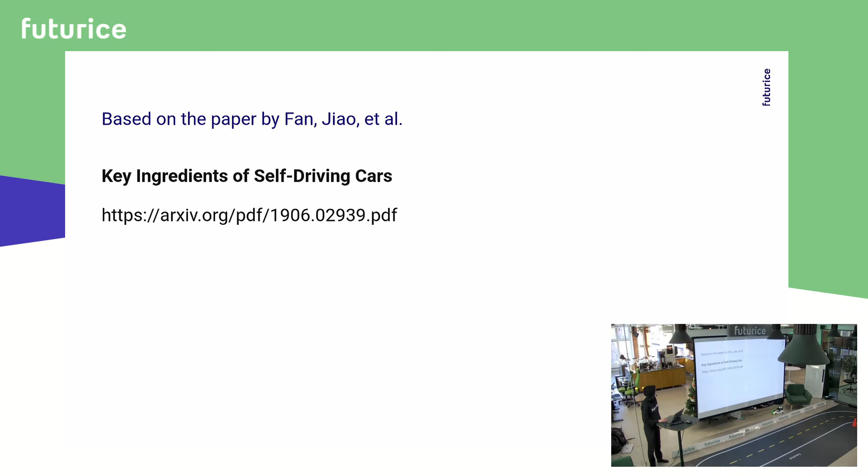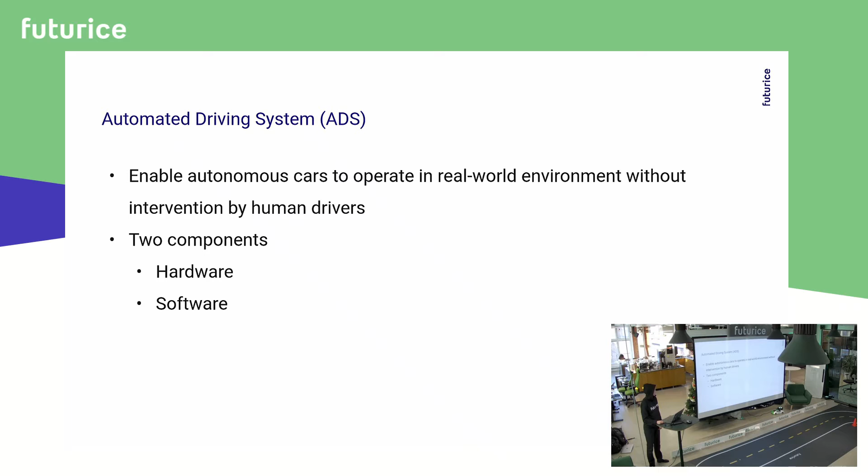So let's move on. Autonomous car systems is the topic. If you think of an automated driving system, their main point is to enable these cars to operate in real-world environments without intervention by human drivers. Now, it doesn't have to be completely automated. It's very helpful if it's just partially automated, as we all know.

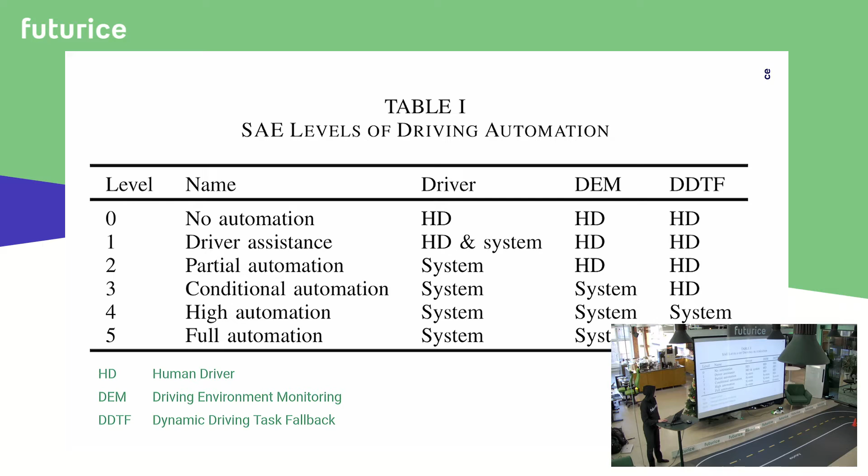These systems can be divided into two parts, the hardware part and the software part. You may have seen this before, but this is kind of an official table, I don't even remember what SAE stands for, but these are defined as the levels of driving automation. When you look at this table, HD stands for human driver, and there are some other acronyms at the bottom. At level 0, when you have no automation, the human driver is responsible for everything, and then incrementally the system starts taking over. I believe these higher levels are way ahead in the future, but this is kind of a hopeful table that has been set up.

Now, everything starts with the sensors. Some of you probably have been tinkering with a car, so you know a lot about these sensors. But here's just an overview of what would go into an actual, not mini size, but an actual autonomous vehicle. First of all, there's cameras.

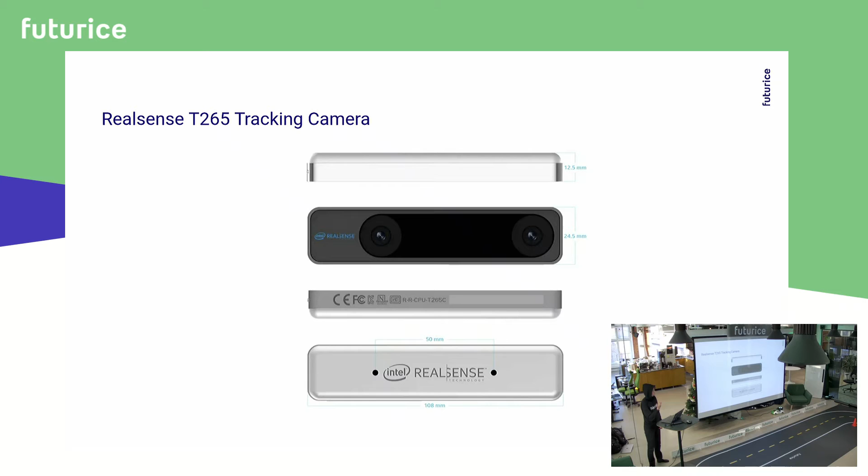Well, this is not from a real human size car, this is from our Markku, so there's not much use of this yet. But this is a tracking camera. A tracking camera basically takes care of reporting where the car is. It's important to track it through time.

And then there's the possibility of taking a stereo camera and images that are slightly different, and then with algorithms constructing a 3D model of the environment using that camera without a LiDAR. Here's the one that we have here from Markku, and we have great plans for this.

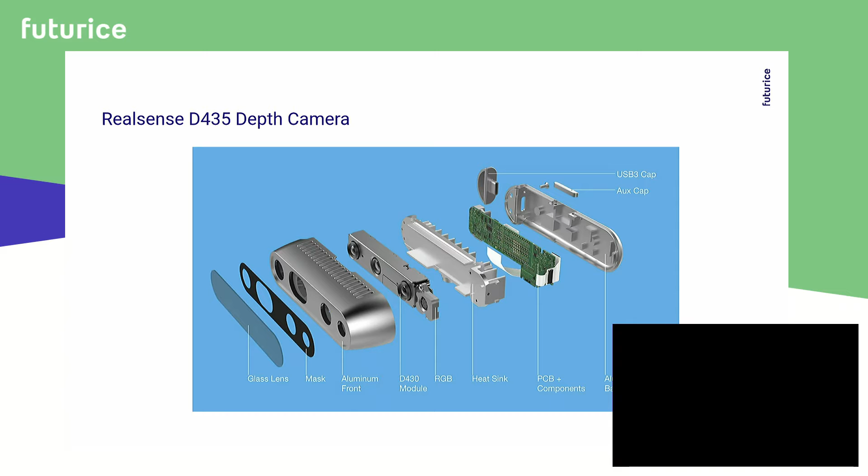Then there's also a company called Wayve, W-A-Y-V-E, who developed maybe a year ago this car that they were training with reinforcement learning. A human driver would drive it, and then in 20 minutes or so it would learn from the corrective maneuvers of the human driver. I believe they were just using one monocular camera, so no stereo vision, just a single camera. So maybe you don't necessarily need all of that stuff. It's a good idea to have many of those cameras, but still they don't have to be super fancy, even for real cars.

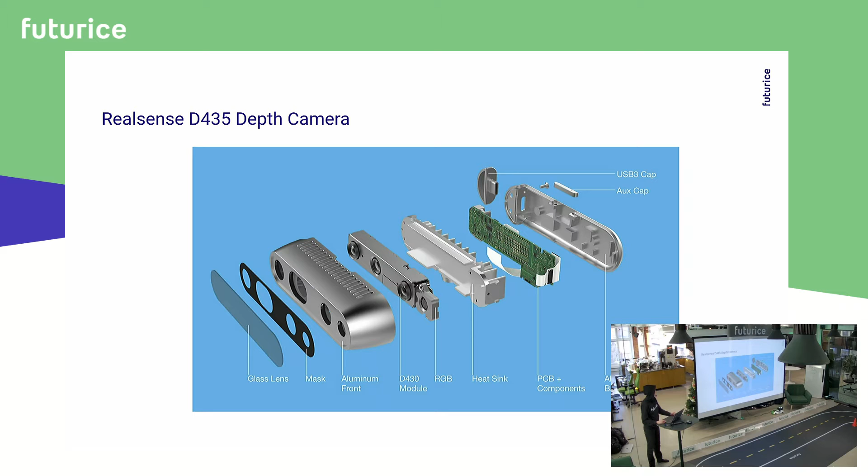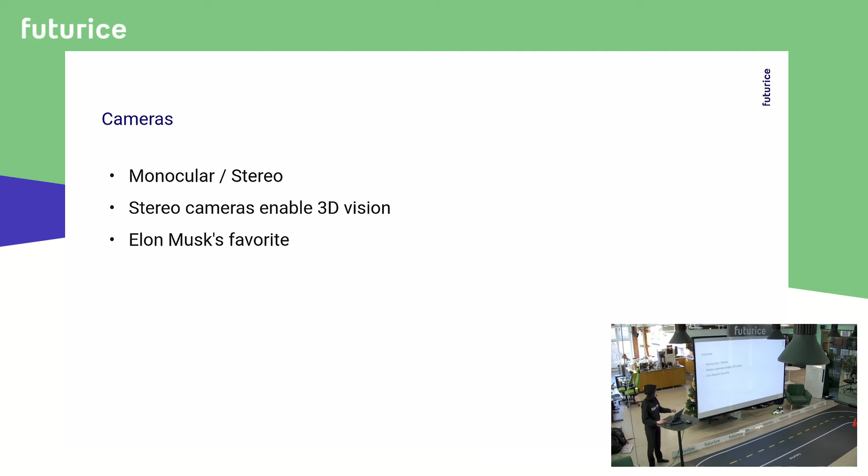LiDARs are short wavelength, obviously. They have a wider field of view, and the problem with them is that they kind of have a short range, at least the affordable LiDARs.

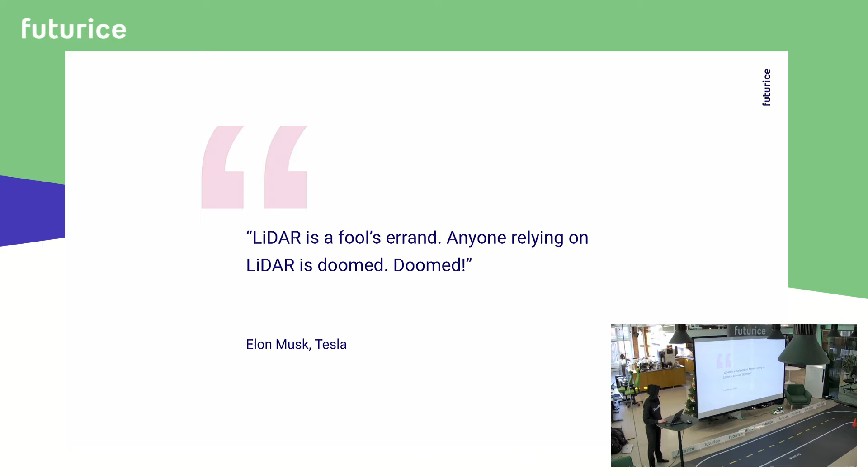And this is Elon Musk's pet peeve. He thinks that they're almost evil, as he has stated. I don't remember how long ago this was, but he has stated that people using LiDAR will be doomed, and that they will realize that they've made a huge mistake. And the reasoning is that it's an expensive piece of hardware, and if you have something that can break, it's useless in his opinion.

And there's actually research to prove this also, although the argument in the previous slide wasn't super convincing. But this was from an article published, I think, sometime around a couple months ago. At Cornell University, they were actually bending towards Musk's approach in this, that maybe you shouldn't be using this expensive piece of hardware. However, it's super cool, so I don't think people will be giving up on LiDARs yet.

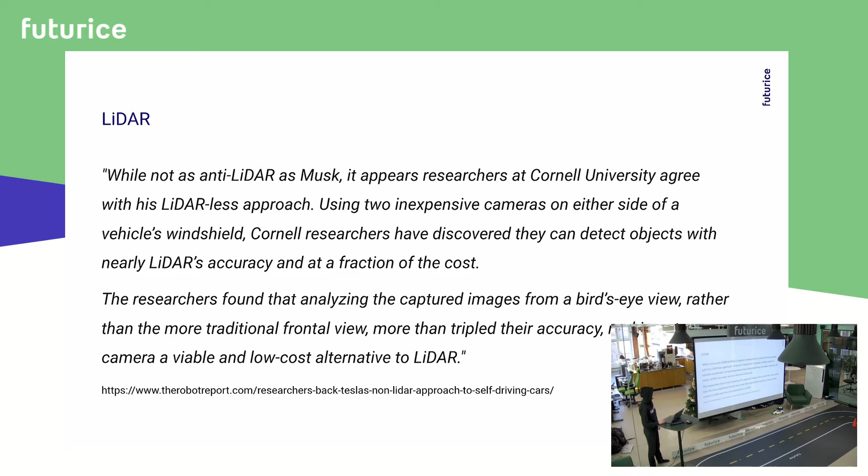Then there's radar, which is of course already in use, with longer wavelength. And this is very good for cases where detection distance is important, so you need a long distance. But the exact size and shape of the objects are not recognized as well because the wavelength is much longer. And then there's ultrasonic transducers.

And here's an example of a Tesla model with the radar. And well, there's just one camera, apparently just one, okay. And then there's 12 ultrasonic sensors. So these kinds of things usually form up the sensor palette.

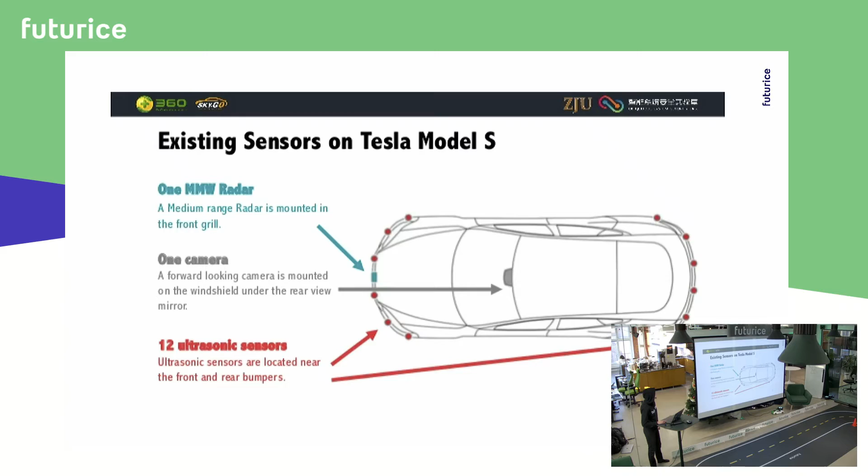Then there's GPS. Sorry, time of flight laser sensors. It's a brand new, relatively new sensor from ST Microelectronics. The exact sensor is the VL53L1X, and it basically measures the distance with the time of flight of the laser. So it hits the laser, it reflects back, and then it just measures the time. And it apparently works better. I think it's the same principle as the LiDAR, just a single unit.

So instead of using ultrasonic sensors, you could use TOF sensors. Just an addition to that slide there.

And well then, of course, there's GPS, but the problem is, as people know, that the signals can be very weak and they can be easily blocked, especially when you have high buildings and these urban canyons. So you need these IMUs and/or wheel encoders as backup for them.

But in all cases, you will never find an ultimate winner sensor, so that you just have one sensor. You will always have different types of sensors and fuse data from them, and that's a good idea, and there's redundancy and everything.

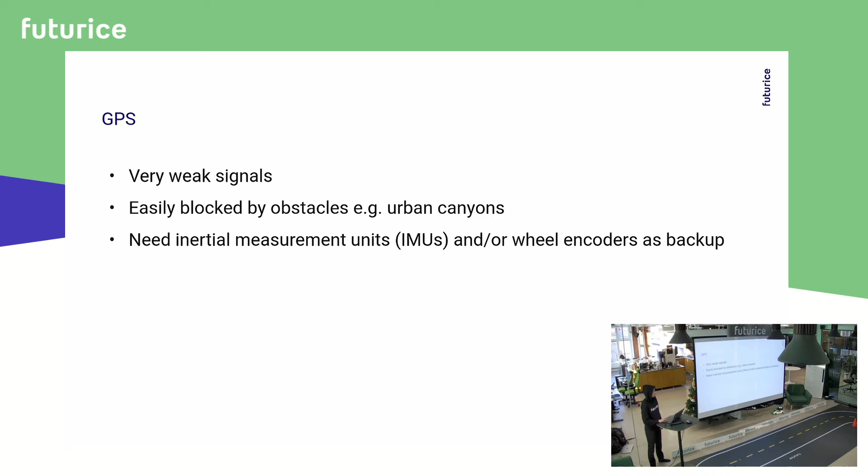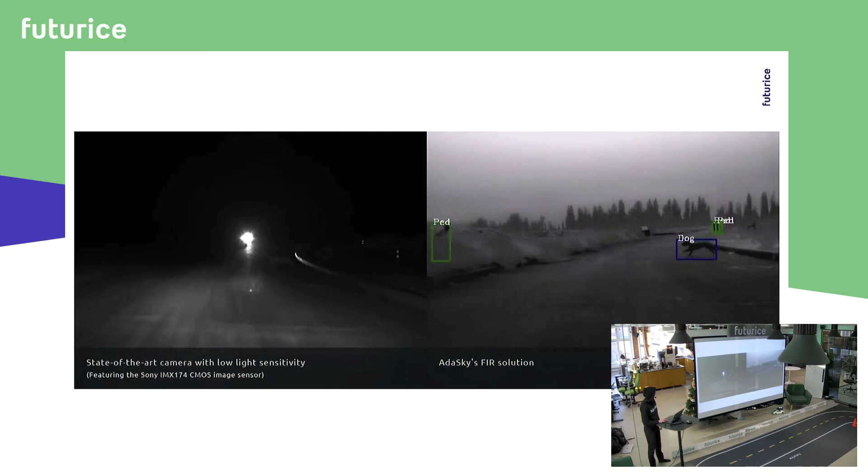Then there's this far infrared. Now, I may have fallen for an advertisement for far infrared, but I was checking out this article, and it seems that it would nicely complement these other sensors, and it's been used, but not everywhere. So here's an example. In scenarios when there's not very much light, it could be a very good addition, and especially this image is kind of convincing.

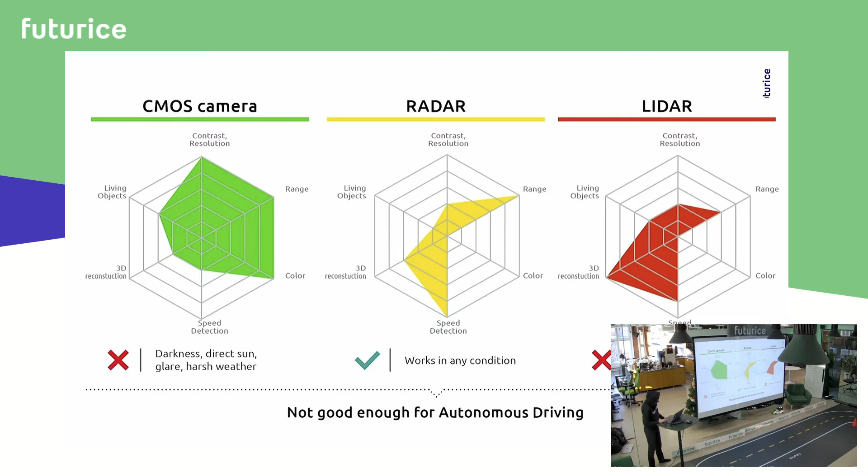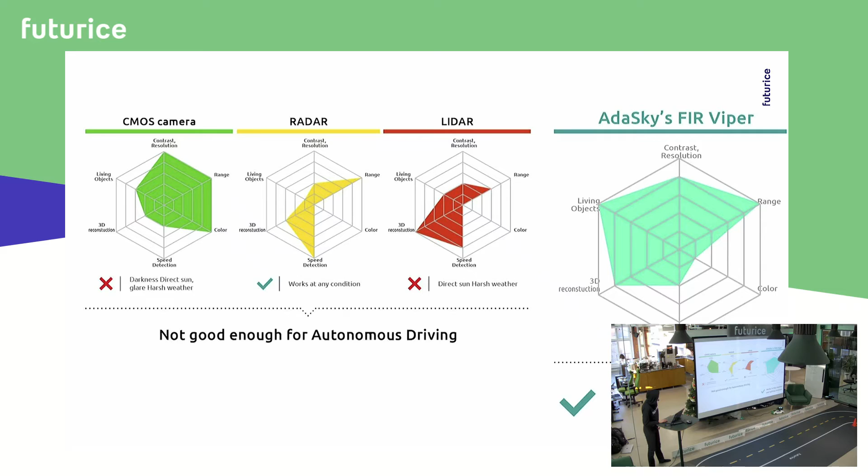And then without the far infrared, when we look at these three that we've talked about now, like the camera, the radar, and the LiDAR, think about the areas. These are diagrams that demonstrate how well this type of sensor is doing in whatever kind of environment. So a camera is good at picking up contrast and resolution, and a radar is not so good. Then apparently, since there are some sectors missing, at least the people who came up with this article state that the far infrared would be a very good idea to add to this palette. But these are the kinds of things that you have to consider when thinking about the set of sensors that you will be putting on the car.

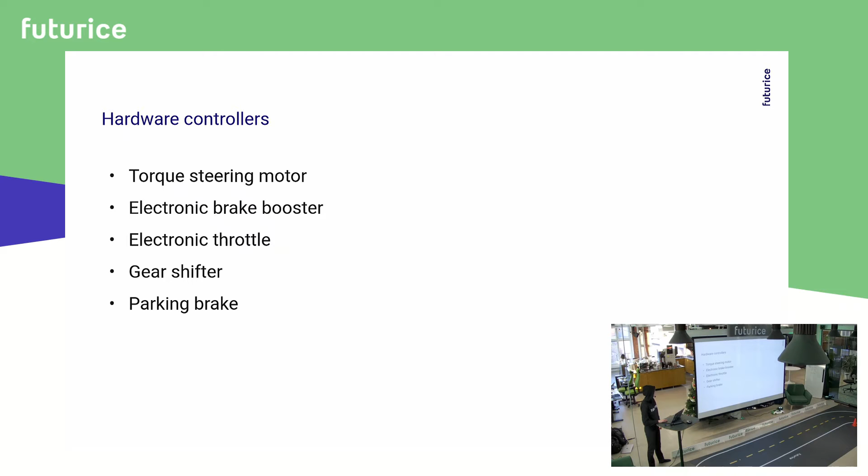Then there's the hardware controllers. So you have a motor, you have a brake, you have a throttle, a gear shifter, and a parking brake. Our cars, or these little cars that people have been tinkering with, obviously don't have these necessarily, but for actual cars you will need them.

And localization and mapping has to involve communications with other vehicles. So now for very short introductions of these modules. This is going to be an overview, basically just introducing these names. Hopefully there's something you haven't heard before, but even if there is, repetition is the mother of something - I don't know what it is in English.

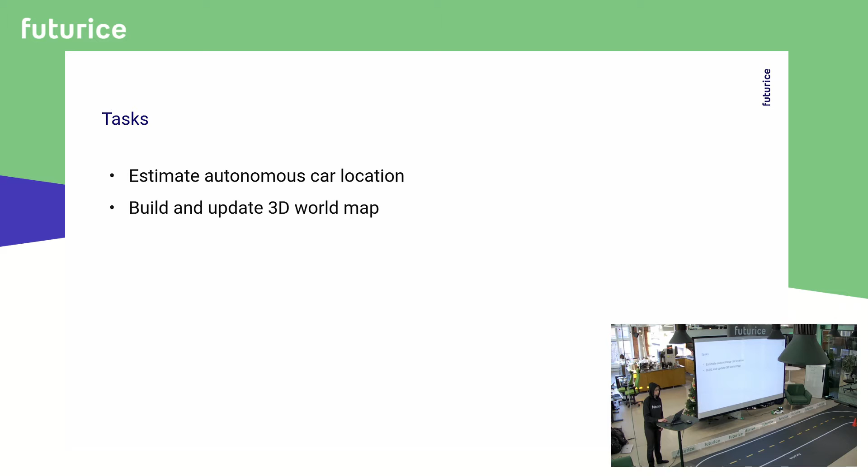Then there's the localization and mapping module. Its tasks are to estimate the location and to build and continuously update the 3D world map. There's this method, SLAM - simultaneous localization and mapping - which comes in 2 types: filter-based and optimization-based. Again, I don't really know much about this. If someone is an expert on this, please speak up now before I speak.

Okay, enough silence. So how I understand this is that the first one, the filter-based, is about incrementally taking in the sensor data and going with it, not really looking back. The other one is looking back at the previous poses, and there's a difference. Definitely look into this - SLAM keeps coming up everywhere, and it's the key to everything. Although it was invented in the 80s already, I believe they're only now making good use of it because there's so much more computational power available.

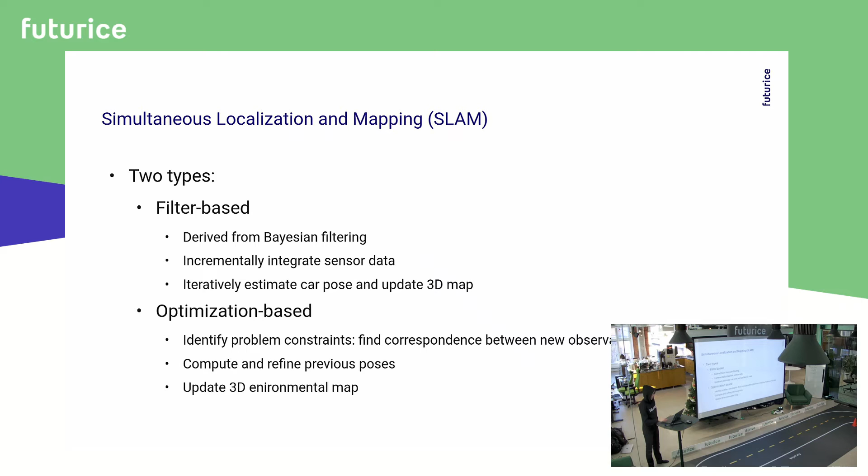Well, in essence, when something is moving around, it constantly has to know where it is, and it has to update its map accordingly, as we do - but we are born with this skill.

Then there's the prediction module, which analyzes the motion patterns of others - a big issue. Of course, it gets easier when everyone starts using autonomous vehicles, because then there's less observation to be done. You can perhaps trust the information you're getting from those other vehicles. A host of other problems from there as well, of course. But the prediction module predicts future car trajectories, its own and those of others, enabling the autonomous car to make appropriate navigation decisions. Again, there's morals and ethics involved with this, but I'm just conveniently skipping that part.

There are 2 ways to make these predictions for now: model-based and data-driven based, kind of analogous to the difference between having a model or just having data. There was also mention of people trying inverse reinforcement learning. We're going to hear about reinforcement learning in the next presentation, and perhaps you can bombard the presenter with questions related to inverse reinforcement learning if you wish, but I can guarantee nothing because I've only heard about it recently.

Then there's the planning module. Its task is to determine possible safe navigation routes based on the information received from the previous modules. You have to do three things: plan the path, choose the maneuver - here you obey the traffic rules, you can of course remove this need so everything gets easier, but then you go to jail - and calculate the trajectory. I think this is the part where you actually think about things like the comfort of the passengers, because you could take a car from point A to point B in a horrendous way for the passengers, but you might want to accommodate them.

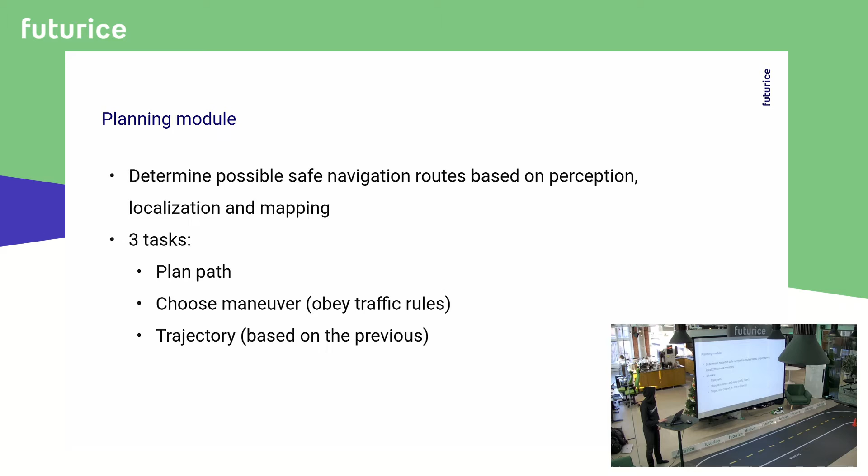Then there's the control module, which is all about throttle, brake, and steer. You have an ideal state - what you want to have - and then you have the observed state, and you try to minimize the error function between those.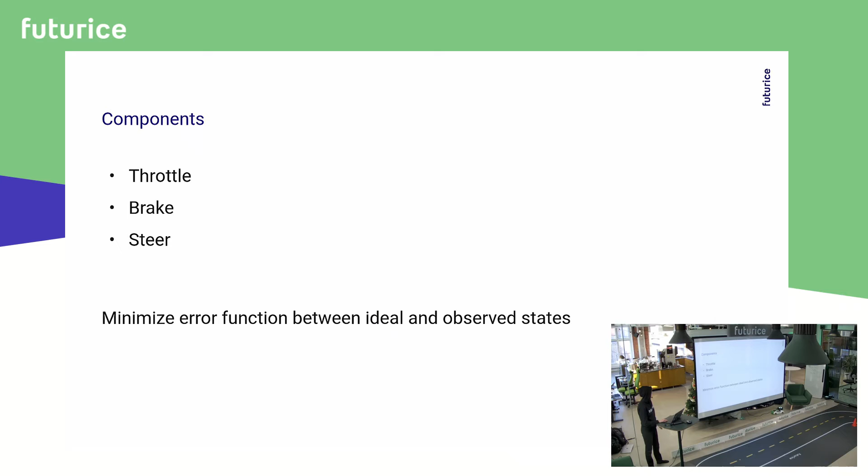There are open source datasets available. How many of you have made use of these, some kind of open source dataset, or have you just collected data from your own little car? Mostly the latter, okay. There are some available, and I don't have the URLs here, but I think we'll be posting this presentation somewhere, so I will add them in due course. Definitely check them out.

About this industry leader thing, I was looking at these—I guess these are considered the leaders at the moment, but when I was looking at the accident rates, they were so strange. In this article, it said General Motors had something like 2 accidents per 200 kilometers or so, but Tesla had like 1 accident per 3 million miles. I don't know if there's something wrong with those metrics, but I'll have to check them out. Obviously, how do you measure the successfulness of these? There are so many things to consider—safety is probably first, but there are many dimensions against which you can measure them.

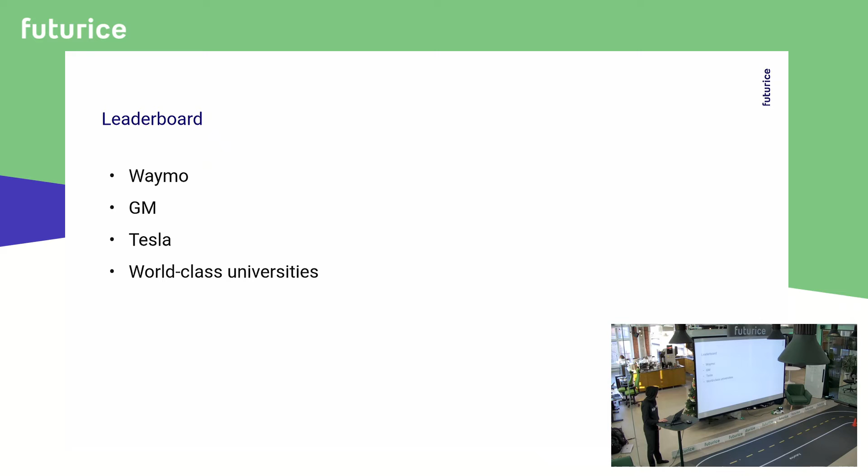The universities are also keeping up nicely. But yes, there are challenges, many challenges. According to this paper, at least, the main challenges were related to the perception module for now.

There's the issue of poor weather, and you've probably run into this when training your cars. Poor illumination—darkness, contrast, like when you go into a tunnel. That is something many of these systems have a very hard time handling, even the pro systems. You have bright sunlight, then you go into a tunnel or come out of it—sun contrast, reflections, and shadow.

I believe that snow and all kinds of strange forms of snow, slush, and these things that Eskimos have a million names for, are probably not at the center of investigations in warm places where a lot of this research is being done. So I believe there are additional challenges related to snow, cold climates, and black ice.

What is wrong with my writing? I'm sorry, I was in a hurry, and my network connection also failed on me, so I'm double sorry.

Then there's the complex urban environments, and the methods are still a bit intensive. Actually, thinking about the Elon Musk argument, wouldn't the point of using lidars be that you get to sidestep a lot of the computation? I don't know, I'll have to read the paper.

Do you have a statement to make? Do you want to use me for it? Oh, you have another mic. Thank you—no statements, but thank you, Inka. And next, Natalia.

Okay, I think I have quite an ambitious title, right? But I was thinking about how to call it and how to make it more general, and I came up with this title. So sorry if it's too general.

I come from Tampere University—the former part is Tampere Technical University—and I'm doing postdoctoral research there. I started a year ago working more on robot learning, and before that I came from the signal processing department, not from RoboLab or the mobile lab, and before that I was doing signal processing for some underwater robots and some computer vision. My PhD was about computer vision, but in a more traditional sense—I did it six years ago, before the rise of neural networks. But nowadays, as you know, there are neural networks everywhere.

A year ago, I started my Academy of Finland project about robot learning. We have several more people doing their PhDs and masters. So I'm now going to tell you about it.

I'll talk about robot learning approaches and recent trends that I like and that you might want to use in your systems or in future work. Then I'll tell you about my favorite project from everything we're doing, more from the practical side, so you can also see how it works.

Like the previous speaker, I think we... how was that word? We complement each other, because now we will go more toward learning and see some examples in practice of how that could be done.

I prepared a slide where I formulate this racing problem as reinforcement learning and describe the components, in case someone might want to try it. I also have some hints on how I would approach it, and we actually have a bachelor student approaching it that way. Maybe he will join this event at some point, but we have different cars, as you'll see.

So let's go to the topic. There are robots, and robots are very different.

Nowadays, when I was doing my PhD, which I completed 6 years ago but started 10 years ago, learning was mostly concentrated on the vision side. For example, for computer vision, the ImageNet dataset appeared and a lot of work was done on that. But robot learning was done more with traditional methods like optimal control, and those two areas were not intersecting much.

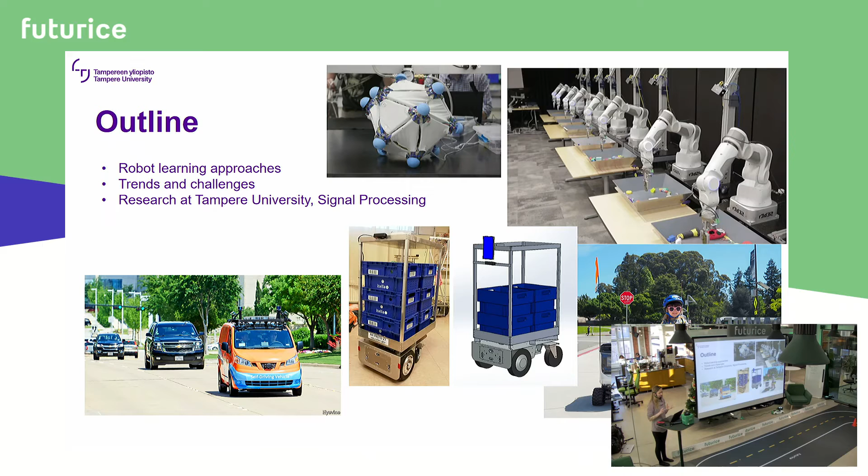So then there appeared this whole paradigm of reinforcement learning, which is learning where the agent takes an active part in it.

The difference is that this approach, reinforcement learning, was formulated maybe in the 50s or 60s. Before that there was optimal theory, game theory, all kinds of things, which were then joined together, and from there became this reinforcement learning area of research.

So there is an agent. The agent acts in the environment, observes the environment, then acts, and takes an action that it thinks is best, and then gets a reward. The agent has some goal - someone told the agent what the goal is - and then the agent tries to optimize its behavior.

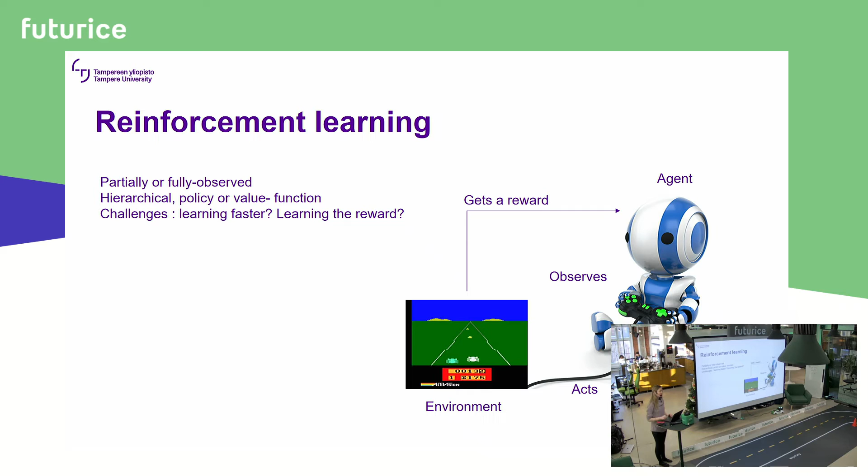So I listed here some hints for myself. There are problems with that - it will take a lot of time for the agent to perform in this environment from scratch. Then who will actually formulate the goal, who will formulate the reward? If you start thinking about how to implement that, what is the model behind it? What are you trying to optimize?

I'll go fast through the current trends. I won't go deeper into the theory because you can check it yourself, and maybe I can talk about that later. But I think these several works that I mentioned are covering quite important topics in reinforcement learning now, which could be utilized further by you.

For example, it's very handy to train in the simulator, as the previous talk was saying. It's very important, and I would definitely try to do it in your place, because you save time and resources. Of course, how you transfer from the simulator to the real world is another question. In this work from 2019, they said that they can train a similar system in the simulator, then use trials from the real world with a similar robot to modify the simulator so it has features similar to real life.

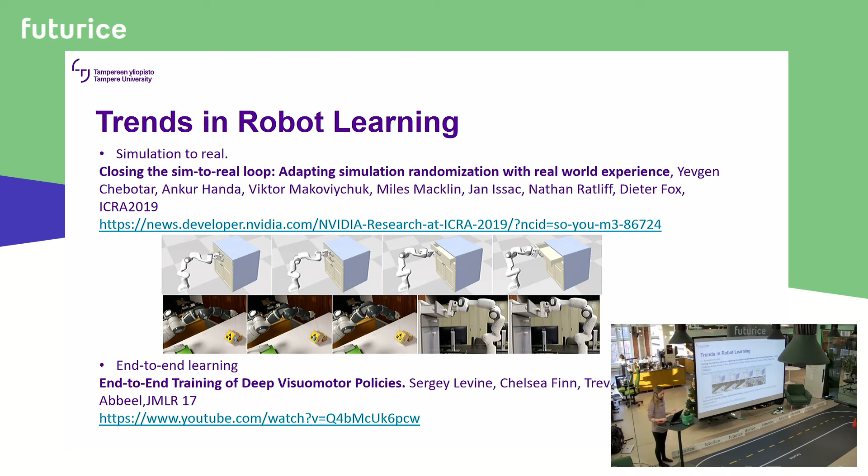Then there is an approach called end-to-end learning. This is one of the ways to approach it, when you have only sensory data - maybe high dimensional, maybe RGB images - and you just try to directly match them to the actions. So you don't think in that structure of planner and perception unit. You want to build a pipeline which handles everything from beginning to end. This is handy but challenging, but some people have attempted to do it.

Then there is a very recent Nature paper, which I didn't read in depth, but it says there are ways to integrate memory into that. It also reduces the learning time and resource usage.

And then there are people creating huge data sets for training, because if you consider a robotic arm, some people have shown that this robotic arm can move this kind of cube on this table. The problem is what they demonstrated only works for this exact robotic arm moving this exact green cube in this exact environment, so it doesn't generalize. So they approached it by creating a huge data set that would cover many possible circumstances in which this robotic arm can operate.

Then there is learning from demonstration, when the user or someone else first demonstrates the correct behavior of the robot. For example, we were also attempting this in the beginning of our bachelor thesis - demonstrating the correct way of driving and then training some model.

Then you can also think about creating some smart sampling of your previous experience while driving, utilizing all the samples you already collected from all the conditions. Also, as the previous speaker said, there are model-based approaches. It's not only that you utilize the model describing the dynamics of the robot, but you can also learn the model that describes your environment. I'll show this a bit later if I have time.

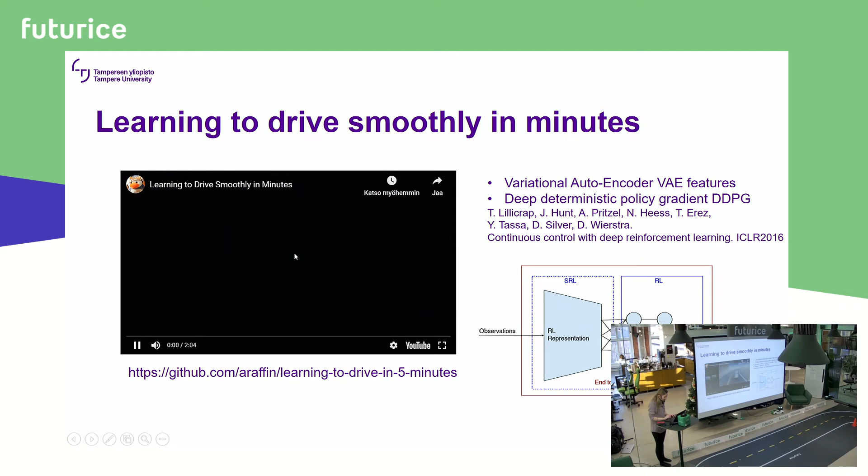Driving smoothly in 5 minutes. Did you see this? So it's like a very handy thing, I think. Well, wait a second. How to press it? So here there is a block. Wow. Okay, we don't need music here.

The point here is that these people wrote a blog post and published a paper, and they presented in Python the virtual environment that you could use. We are using it too, because the track looks similar—only features like the sky may be different, but you can train there any of your agents, even not necessarily reinforcement learning ones.

Although they already provide some code, for example, for extracting variational autoencoder features—the features that map from RGB space to some latent space that describes the image very well. So you could use this one, I think it's a good idea.

And then it uses this deep deterministic policy gradient, one of the RL methods. So one could try that.

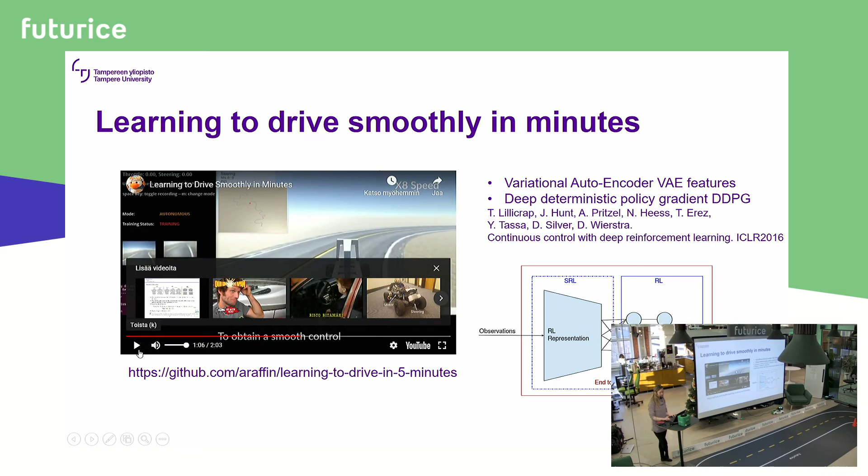On top of that, we also think it might be useful to get some prediction about the environment. I know this comes very fast, but maybe it stays in your mind, and the slides are available so you can have a look. So the idea is: can we model the environment somehow?

There was a paper that demonstrated that in game planning you can predict the future environment based on what you see and what action you take, and it helps you behave better. So that's another idea that can improve all these things.

There's a link to the paper, and they have code too. Then, I would like to show maybe something that we were working on.

And it's not racing cars, no. At Tampere University we got this track, thanks to Mikko, I don't know how this all happened, and thanks to Futurice.

Since we have this track now, we also have MonsterBorg cars. For some reason we already had monster board cars before we knew about donkey cars, so we could still think about changing, but we have several monster board cars and several students working on them.

After we got this in spring, we started making up something with those. So maybe we will also appear here as a team one day.

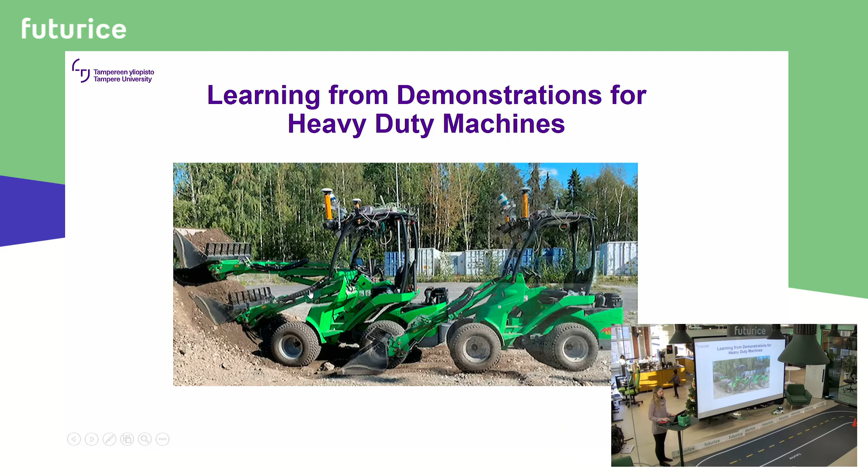We decided at that point, when we didn't have a simulator—nowadays we are going to get one—to record demonstrations. It was the day before Juhannus, and we were thinking we'd record maybe 100 demonstrations, and we did it the whole day.

I also get skeptical, because technical problems are 50% of our work, I think. You just start doing something and there are technical problems, so it's normal—it means it's progressing.

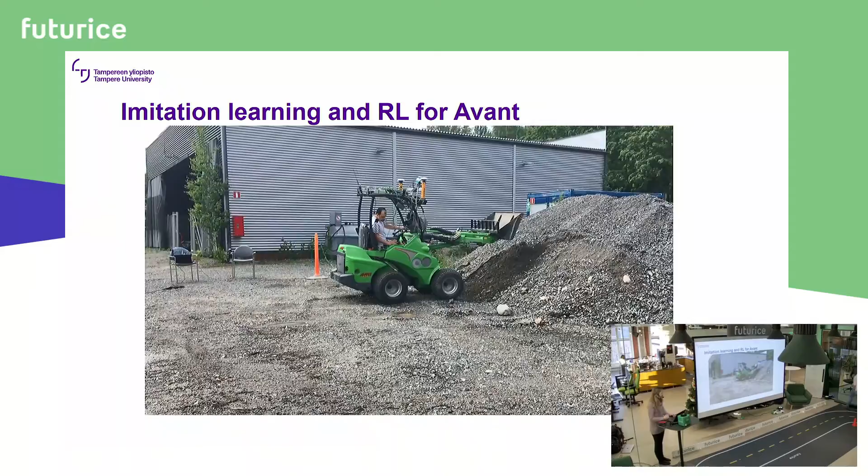Oh my God, I think there's some delay in the video. But anyway, that guy was out there collecting the demonstrations. And also there's this problem of who restarts the system, because the system has to go forward and perform the action.

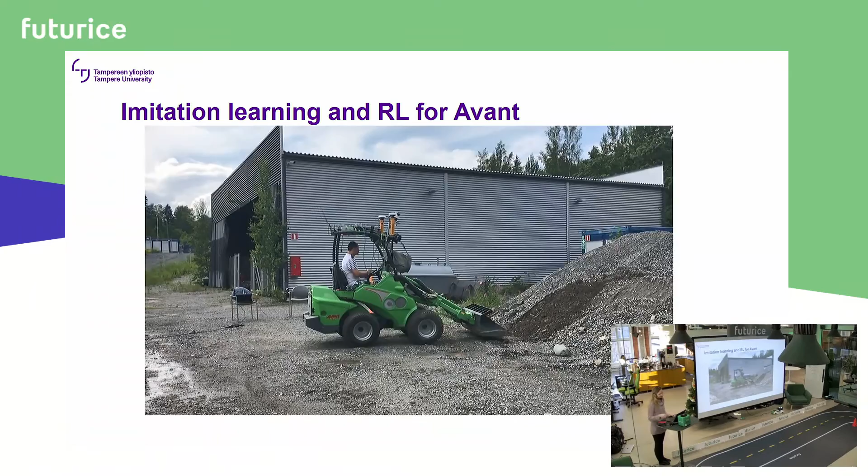I get skeptical when people say we have a professional driver who can in 2 hours collect millions of demonstrations for us. That's not true. A non-professional driver can collect maybe 100 or 200 demonstrations in one day, so you have to be modest about that.

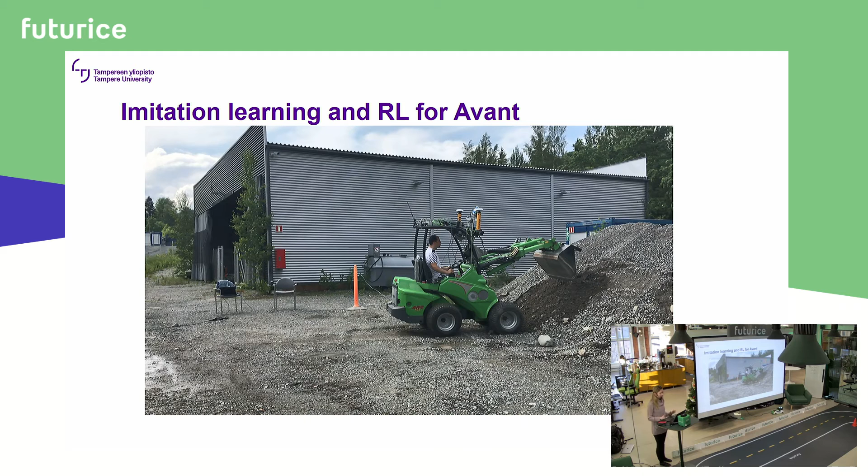This is an example of signals we collected apart from the camera, and these are some unsigned values, sorry for that. But anyway, as the previous speaker said, there's lots of data available, and one has to deal with it.

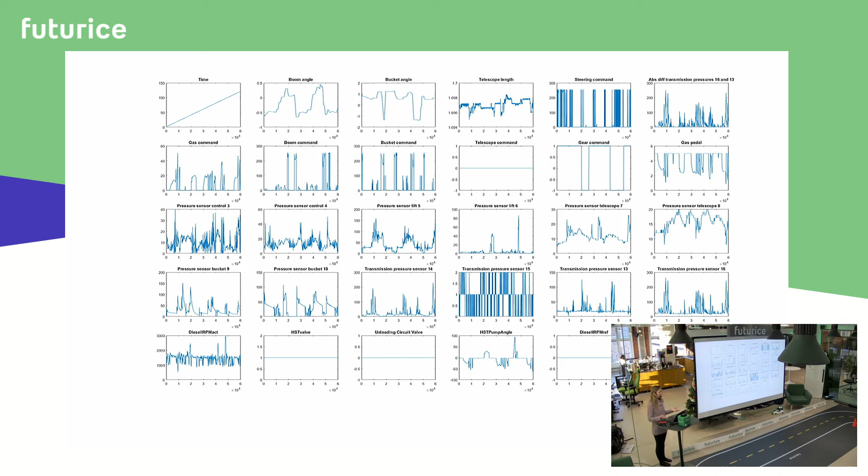This is the demonstration we collected, so the machine sees it like this: it's far away, then it drives up and scoops, and a full scoop is a good outcome.

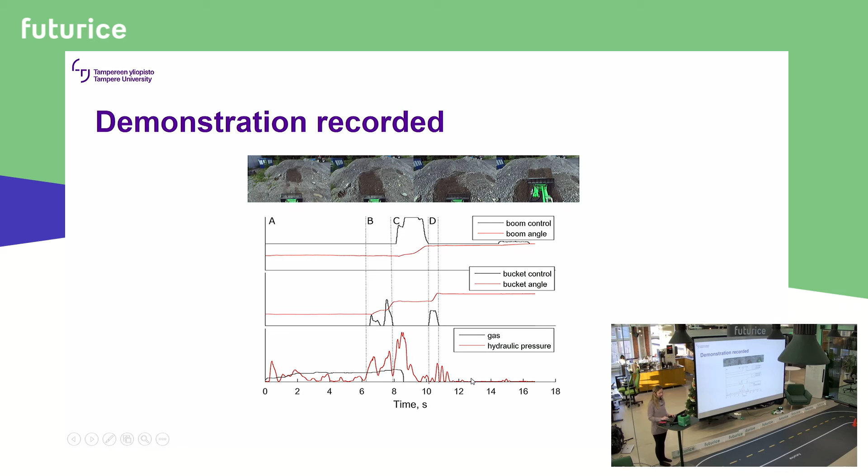We also recorded data because we had ideas about which pressure sensors might be good or not. For example, here is the boom angle and the bucket angle, and here is the hydraulic driving pressure. When it approaches the pile, it has to drive in a certain way, almost crashing into the pile, and the hydraulic driving pressure grows, which may be a hint to the algorithm, but we didn't specifically say that.

These are some references our work is based on. The idea is that we get the reward at the end of the action, and we evaluate it visually, using learning from demonstration.

The special thing about this work is that you are manipulating a granular material, like loose material, which presents extra stochasticity, like driving in an unknown environment. The environment presents additional variations, because you don't know how the material will behave. You are modifying it, and it becomes complicated.

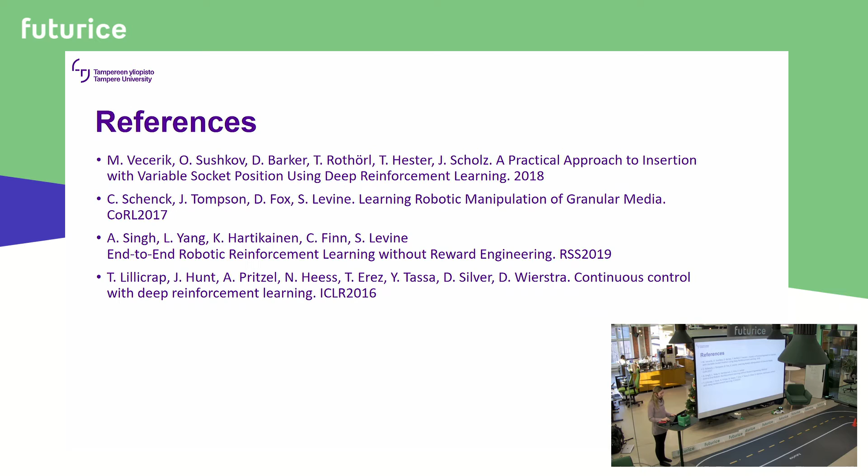We used visual features which we trained in a Siamese network way, so that we want to distinguish between failure examples and success examples. We feed those examples to two networks, and we want to maximize the distance between features of dissimilar examples and minimize the distance between features of similar examples.

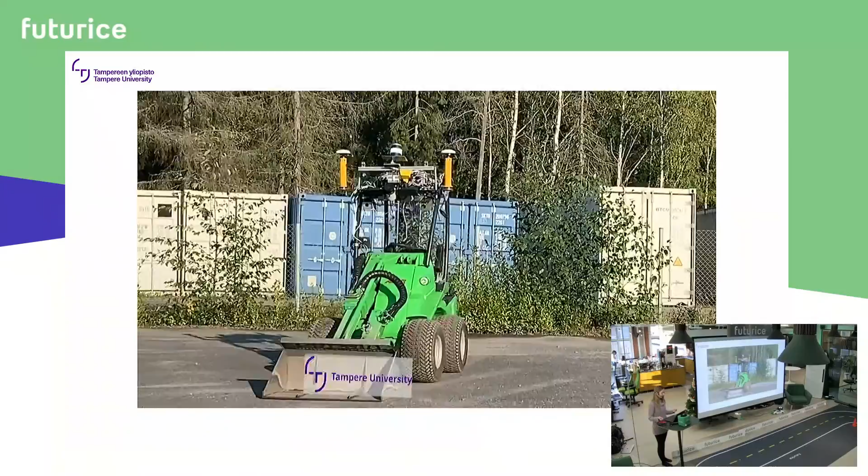I must disappoint you, we are working on reinforcement learning, but we did learning from demonstration. So we are on the way towards reinforcement learning, but we needed some kind of learning before. We show that it outperforms the state-of-the-art neural network controller, which of course we attempted.

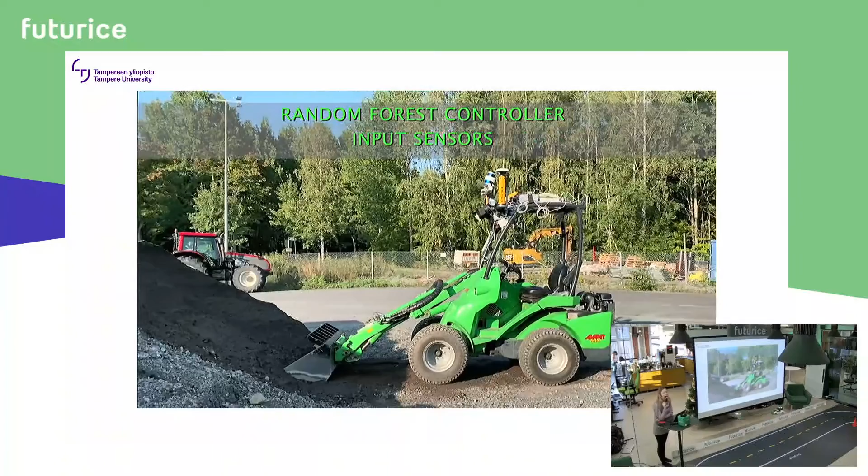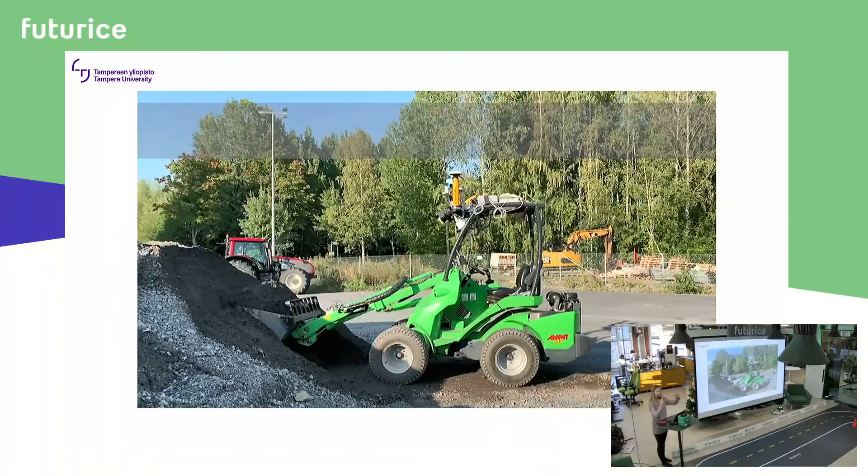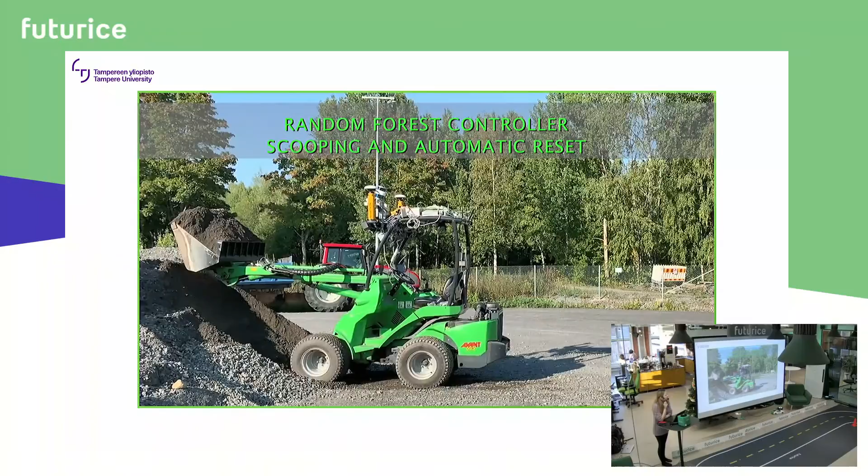The thing is, when a person demonstrates some actions, they sometimes show them differently, taking even a different route. So in the data space it looks like multimodal data, and neural networks sometimes learn average behavior, which is not so useful in those cases. That's a reason why we also use random forest, and we show that it works better than that.

I don't know why there's something wrong with the video. Sorry, but it works smoothly. It doesn't look like it. How efficient is it right now?

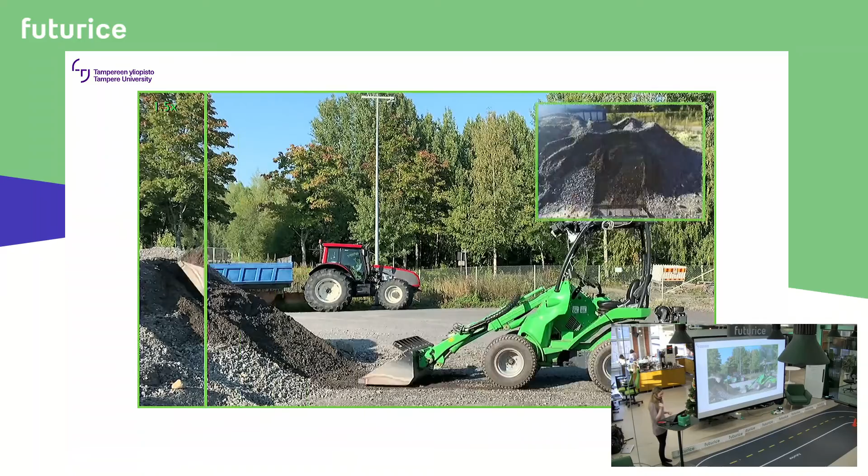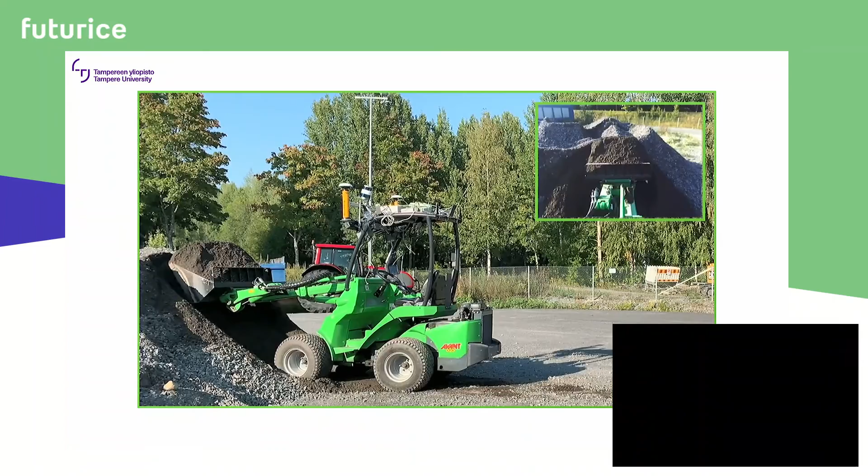How efficient is it? Is this moving right now? There's also this additional difficulty: when we recorded the demonstration versus when we are testing, it's always a different daytime, sometimes evening, sometimes not. So there's a big variation, and we might say it succeeds about 80% of the time. I think it's quite good.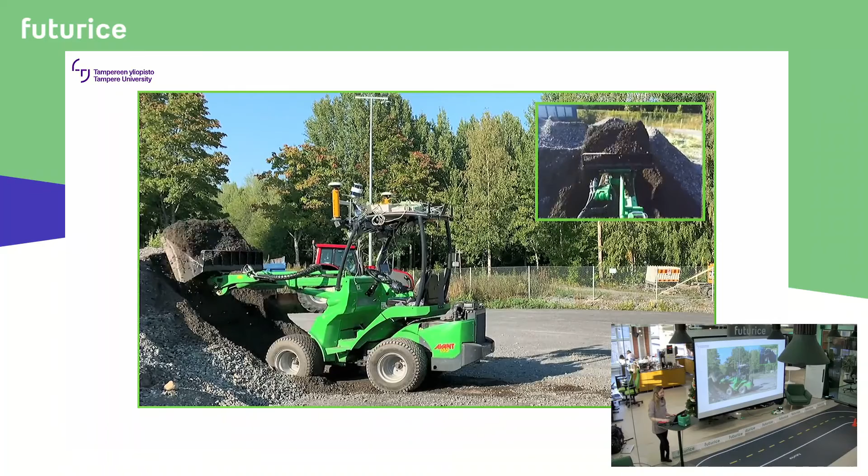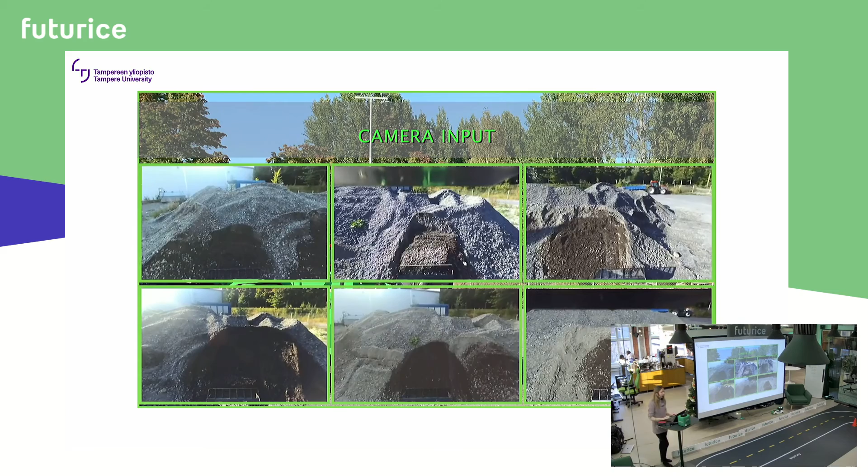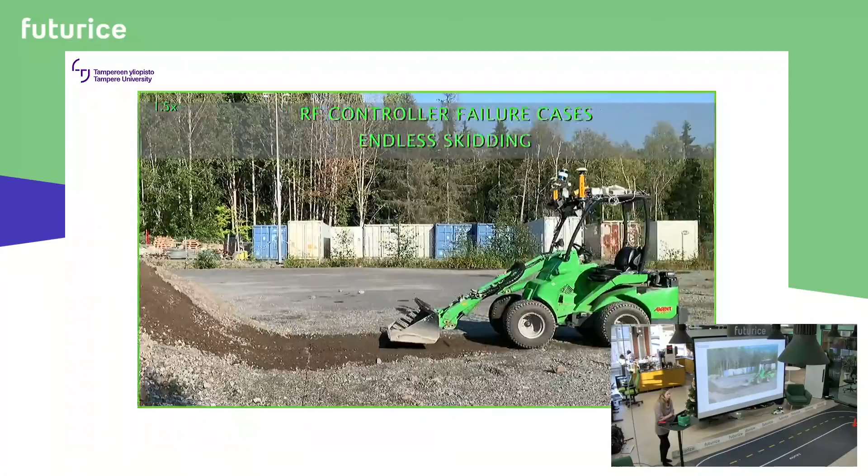Right now on the pile, as it keeps loading, the pile should advance, and then the machine should advance to engage the pile. Does it do that automatically? This is, we don't know exactly how it does it, the algorithm does it, because the pile moves ahead. So when the machine's bucket is engaged, sometimes it has to go forward.

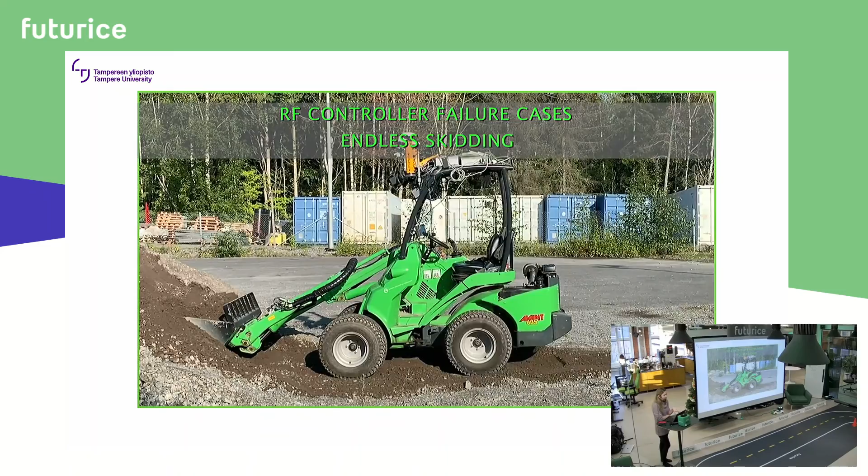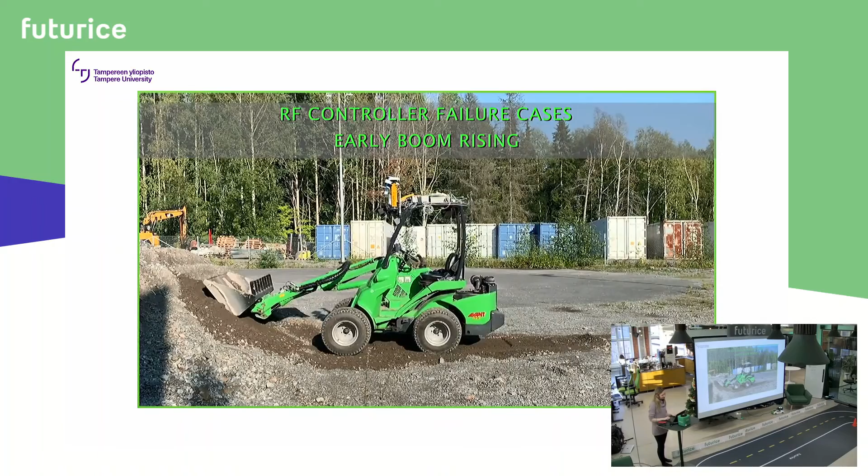It's this—I think those hydraulic driving pressures take care of that. There are pressure sensors in the machine which help it not only to see but to understand. The pile is modified, right? Yeah, but still when the pile begins, the hydraulic driving pressure grows, and that gives a hint. Then when the bucket hits the pile, another pressure sensor gets engaged. So those signals are fed to the system.

In the future we want to robustify the reward. We want to robustify the features because there is lots of variation.

You do that through MATLAB? No, Python. MATLAB, like Simulink, is responsible for the control of the whole machine, and we communicate with it using a Python script. Open source stuff? I don't think so. This project is not sponsored by any machinery companies yet, so if someone wants to collaborate...

Should I throw it into you?

So just to clarify, you guys have used supervised learning for this example, right? Yes, this is supervised learning. And you're planning reinforcement learning in the future? Yes. So do you have some sort of simulation you're building or implementing, or is it going to be reinforcement learning in the real world?

The thing is, in summer we were trying really hard to make this work as reinforcement learning. We spent lots of time trying that, but we found that training from scratch, we don't see any result and cannot evaluate whether any method is working. So just this week we were visiting Mevea and we will get simulators from them. They are not an exact copy of our machine, but they are some excavator there, and we can train things and see whether those methods we intend to use converge and produce any solution for similar tasks.

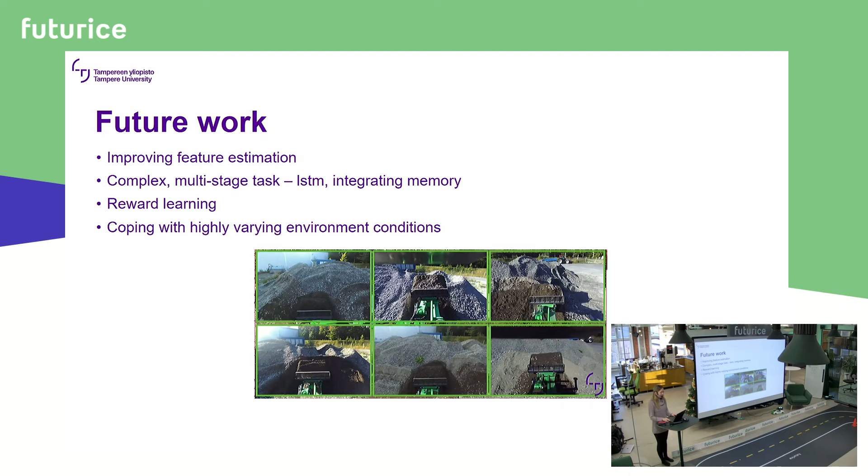It was cool. I have a question.

While you were doing reinforcement learning, how do you handle the balance of exploration and exploitation? There are different ways to do that. You can do it almost by random, or you can try to define some variable that over time, by some measure, gives less randomness. Or you can use replay sampling from a replay buffer, so you can see whether using your previous experience helps reduce the need for new exploration. There are publications on that.